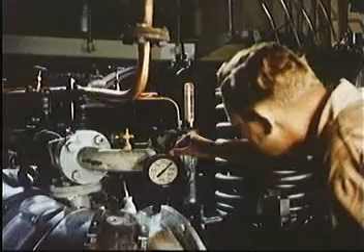His routine inspection takes him further down to the second platform with the intercoolers for charging air.

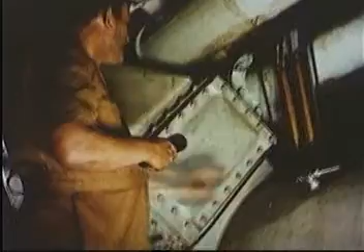Now he reaches the bottom, where his flashlight reveals the return piston cooling oil behind the sight glasses.

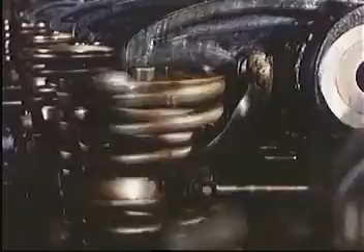To make a further study of the diesel engine, we leave the engineer and his instruments and put sight glasses on the engine from top to bottom. This reveals the movable parts: pistons, piston rods, crossheads, and connecting rod and crankshaft.

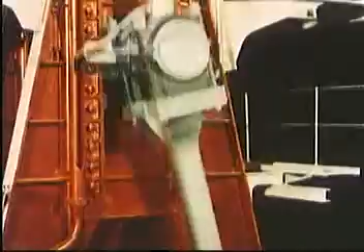This sectional view shows the function which the most important parts of the engine have to perform. In the upper part of the cylinder, an amount of fuel oil is burnt, which causes the temperature, and thereby the pressure, to rise in the combustion space.

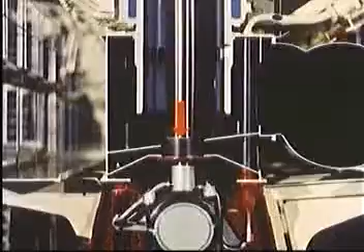The gas pressure acts on the piston, from which the force is transmitted through piston rod and crosshead to the connecting rod, and results in a torque. The thermal energy has been converted into mechanical energy.

In an arbitrary piston position during the working stroke, the crosshead is exposed to a vertical force from the piston rod and a force in the direction of the connecting rod, which together result in a horizontal force.

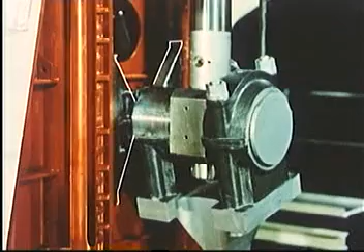This horizontal force must be transmitted to the engine frame, and for this purpose, the crosshead is provided with slide shoes supported on vertical surfaces, the guide faces on the engine frame.

Powerful forces are at work in a big marine engine, and accordingly, the engine parts are of big dimensions. In the workshop, with people providing a natural yardstick, one receives a good impression of their size.

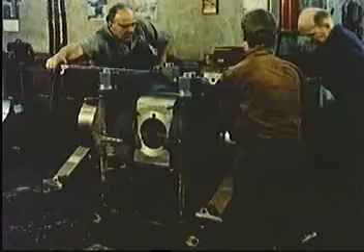So big must the crosshead slide shoes be in order to transmit the horizontal forces. The high points in the connecting rod bearing, which have been spotted by the contact with the crosshead pin, are scraped off in thin chips.

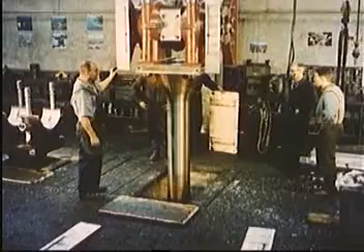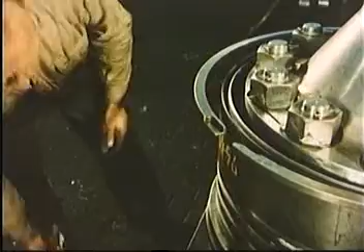To provide tightness against the high pressures, the piston is fitted with piston rings. The ring is fitted by a special tool which imparts an evenly distributed bending moment to it, thus preventing the danger of a permanent deformation.

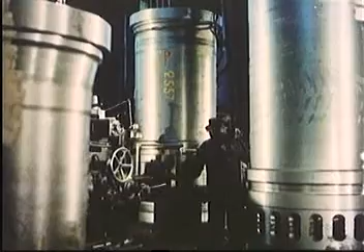The cylinders are not easily overlooked either. The scavenge air ports are bored oblique to a diametral plane to set the scavenge air in rotation.

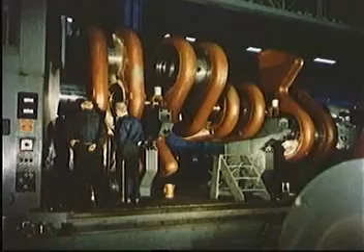The crankshaft is so big that to facilitate manufacture and installation, it's made in two halves, which are bolted together later. Each half is built up from a number of individual parts.

Main bearing journals, crank webs, and crank pins. The crank webs are provided with counterweights.

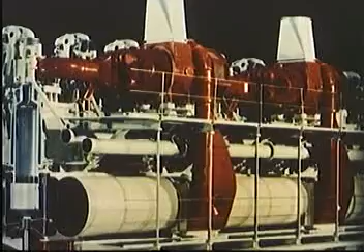Let's look a little closer at the principle on which a two-stroke engine works. Fresh air is supplied by a blower. From the blower, it's conducted in a pipe along the engine to the scavenge air space around the cylinder.

When the piston approaches the end of the downstroke, the exhaust valve opens, the scavenge air ports are uncovered, and fresh air flows up through the cylinder. Exhaust valve and scavenge air ports are then closed, and during compression, the air is heated for ignition of the injected fuel.

The combustion increases the temperature and thereby the pressure which drives the piston. The exhaust valve opens, the pressure falls, and the combustion products are expelled. The air is again compressed.

Fuel is injected, ignited. The gases expand. The exhaust valve opens, then the scavenge air ports. The cylinder is scavenged, and the cycle is repeated.

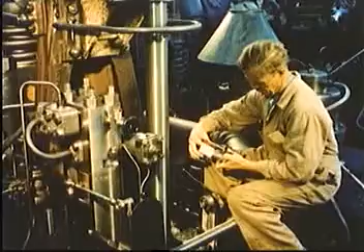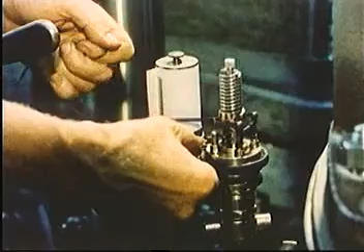The pencil is now moving in time with the pressure variations inside the cylinder. The drum carrying the paper is connected to the drive from the engine piston, its motion proportionate to the piston motion. The pencil records the pressure events during an engine cycle.

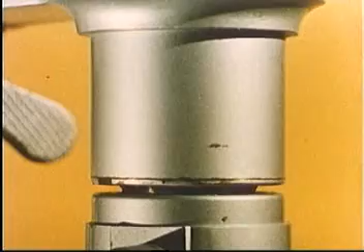The construction of the indicator is simple. Through a duct, the gas pressure is transmitted from the combustion space and acts on the indicator piston moving inside a small cylinder.

The motion is resisted by a spring. This spring is exchangeable so that it may be adjusted to different pressure ranges.

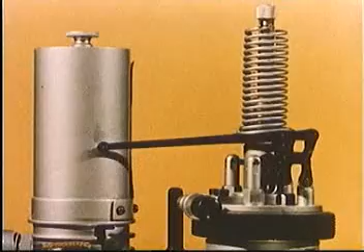The motion is communicated to a lever at the point of which a pencil is fastened. The pencil is pressed against a drum moving back and forth with the up and down motion of the engine piston. Thus, a curve is traced which shows the relation between the gas pressure in the engine cylinder and the position of the piston.

The output of an engine is dependent upon the relation between pressure and volume in the cylinders during compression, combustion, and expansion.

For each separate cylinder, the indicator traces a curve, the so-called PV diagram. The diagram shows that the pressure is almost equal to the scavenge air pressure when the scavenge ports are uncovered. The exhaust valve and scavenge ports are then closed.

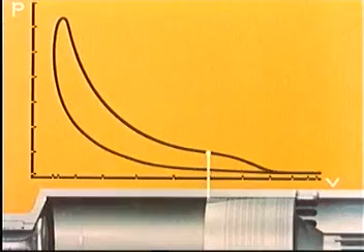The air is compressed, and when the fuel is injected and ignited, the pressure will rise rapidly and remain at maximum during continued injection. After injection, the pressure in the cylinder falls to exhaust pressure, and during the exhaust period to scavenge air pressure.

Scavenging, compression, combustion, expansion, exhaust, and back to scavenging.

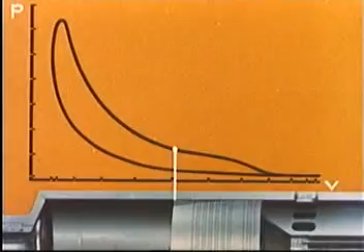The characteristic pressures are approximately a compression pressure of 54 kilograms per square centimeter, maximum pressure 66, exhaust pressure 8, and scavenge air pressure 1.75 kilograms per square centimeter.

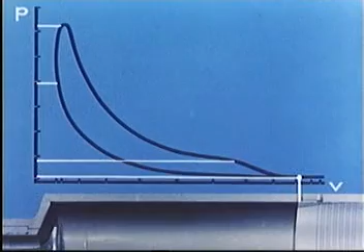From the indicator diagram, the indicated output may now be computed. At an arbitrary position of the piston during the compression stroke, there is a certain pressure, P, acting on the piston top. If the piston travels a short distance further, corresponding to delta V, and if we ignore the minimal change in pressure, the amount of work done, delta A, will be given by the pressure multiplied by the change in volume, or P times delta V.

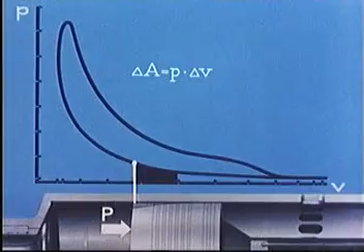This work is represented by the area below the part of the compression line corresponding to delta V. And the same applies to every single part of the compression curve. That is to say that the whole area below the compression line represents all the work that the piston must perform to compress the air in the cylinder.

During the expansion, the piston pressure acts in the same direction as the piston is moving. So therefore the piston receives an amount of work, and it will be seen in the same manner as before that the amount of work received is represented by the area below the expansion curve.

The amount of work transmitted to the piston during a full engine revolution must therefore be the difference between that delivered during the compression and that received during the expansion. In other words, it is given by the area between the curves. Thus, A equals sigma P multiplied by delta V.

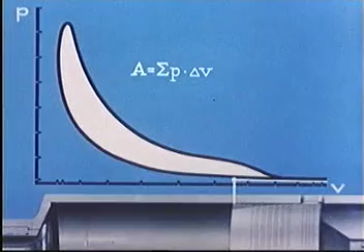One could imagine the same area being produced by a compression stroke under atmospheric pressure and an expansion stroke with a constant pressure on the piston.

This constant pressure, Pi, the mean indicated pressure, can be determined so that it gives the same area as in the actual diagram.

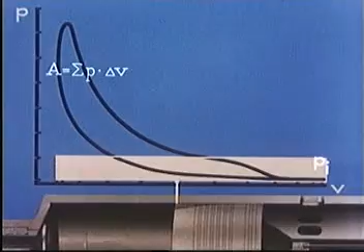In calculating the power, it is a great advantage to have to reckon only with a constant Pi during the expansion stroke, instead of the actual varying pressures in both the compression and the expansion strokes.

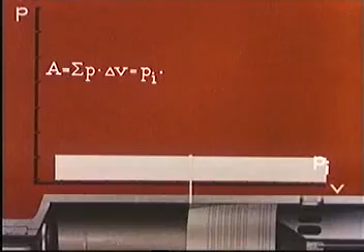The work in kilogram centimeters for one revolution will thus be A equals Pi multiplied by Vs, where Vs is the full stroke volume in cubic centimeters, and Pi the mean indicated pressure in kilograms per square centimeter.

There is one working stroke in each revolution, so if we multiply by the revolutions per second, n over 60, we get the work in kilogram centimeters per second, that is to say the power.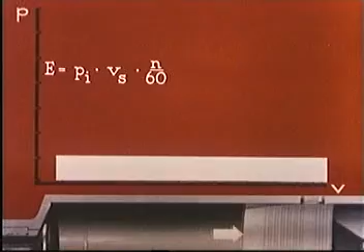Instead of Vs, we substitute the piston area multiplied by the stroke length, that is pi over 4 multiplied by d squared multiplied by s cubic centimeters.

To arrive at the output in horsepower, 75 kilogram meters per second, we have to divide by 7,500, and we thus have the equation for computing the horsepower developed in each cylinder of the engine.

To take an example, an engine with a Pi of 9.5 kilograms per square centimeter, a piston diameter of 84 centimeters, a piston stroke of 180 centimeters, running at 110 revolutions per minute, will have an indicated output of 2,300 horsepower per cylinder.

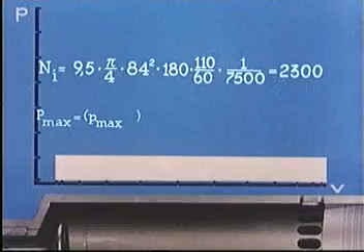The largest force acting on the piston is the highest combustion pressure less the atmospheric pressure on the underside of the piston multiplied by the piston area, or 65 multiplied by pi over 4 multiplied by 84 squared. That is 360,000 kilograms.

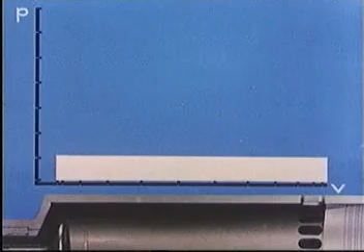The indicator diagram may also form the basis for computing the temperatures in the cylinder.

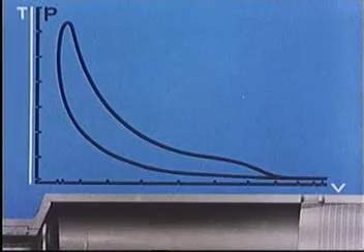Just after the scavenging, at the beginning of compression, the temperature is TO, the volume VO, and the pressure PO. From thermodynamics, we know that the pressure multiplied by the volume divided by the temperature is constant for an isolated amount of air, which is the case here in the cylinder, independent of the position of the piston, so long as the valve and the scavenge ports are closed.

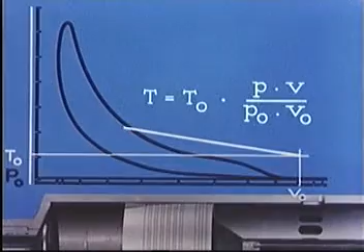The equation can be rearranged to express the temperature T direct for an arbitrary position of the piston. The indicator diagram gives us the values that are to be substituted in the equation when computing the temperature for the top position of the piston.

Substituting the initial temperature, 350 degrees Kelvin, the initial pressure, 1.75 kilograms per square centimeter, the initial volume, 950 liters, the pressure in top position, 54 kilograms per square centimeter, and the compression volume, 78 liters, we find the temperature to be 890 degrees Kelvin.

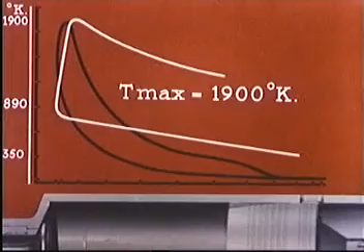The highest temperature occurs at the cessation of combustion. It is here found to be 1900 degrees Kelvin. In this way, the whole of the temperature curve may be calculated, right up to the moment when the exhaust valve opens. To get a better idea of what is happening, we will measure in degrees centigrade instead of degrees Kelvin.

Already during compression, the temperature reaches the melting point of lead. During the first part of the combustion, the temperature reaches the melting point of aluminium. Shortly after that, the temperature reaches the melting point of cast iron. The high temperatures in the cylinders even exceed the melting point of steel.

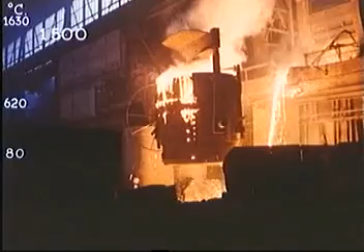Combustion takes place so quickly, however, that there is not time for the high temperatures to be transferred to the cylinder wall. The temperature of the metal surfaces will not exceed the mean temperature of the process, about 620 degrees centigrade. Then again, the cylinder is made of cast iron, which begins to lose its strength already at around 300 degrees centigrade, besides which the lubricating oil will lose its lubricating ability if it becomes too hot.

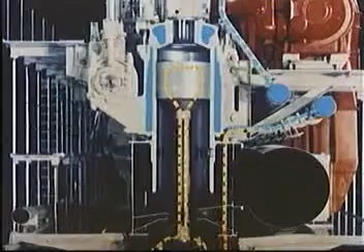It is therefore necessary to provide efficient cooling, partly with oil or water led through the piston rod up into the piston itself, and partly with water circulating through the cooling jacket around cylinder and cylinder head. If a cooling water temperature of about 70 degrees centigrade is maintained, we can prevent the temperature on the inside of the cylinder wall from exceeding 300 degrees centigrade.

This is possible because there is a drop in temperature as the heat passes from air to metal. The gas molecules are in violent motion inside the cylinder, but out near the wall they are slowed down and form an insulating layer. This causes a rapid fall in temperature at the boundary between gas and metal.

Through the wall itself the temperature falls evenly, but as the heat flows into the cooling water, there is again a sudden drop in temperature owing to the retarded motion of the water molecules in contact with the wall.

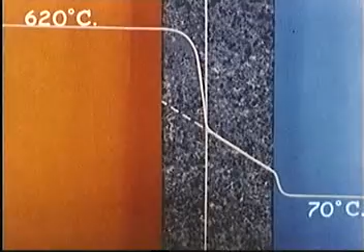The mean temperature of the gas is 620 degrees centigrade, and the cooling water is kept at 70 degrees centigrade. It is possible to calculate a thickness of iron that offers the same resistance to heat flow as the boundary resistance between air and cylinder wall, and similarly a thickness of iron that corresponds to the boundary resistance between cylinder wall and water.

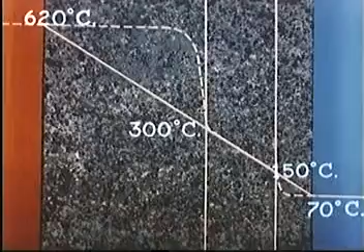As the drop in temperature through the entire homogeneous iron wall will occur evenly, the temperature of the original cylinder wall can be determined. These temperatures, which are calculated for the hottest point in the cylinders, explain why the materials are able to withstand the high combustion temperatures.

The indicator diagram shows that the combustion in the cylinders occurs within a fraction of the time of a revolution. Within this fraction of a second, defined by the flashes, 50 grams of oil must be burned.

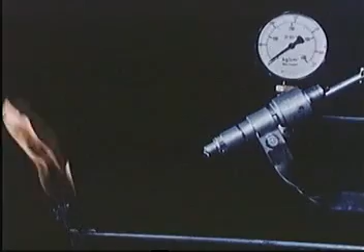A strong atomization of the oil is a condition for the short time of combustion. Without atomization, the oil will not ignite at all, even though the stream passes right through a flame.

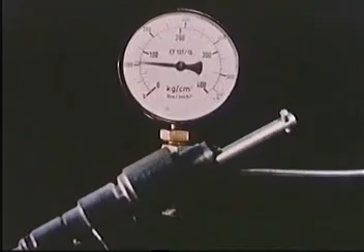If the pump pressure is raised to 80 atmospheres, the oil is more finely atomized, but not enough to ensure reliable ignition. At a pump pressure of about 200 atmospheres, the atomization is so good that all injections are ignited.

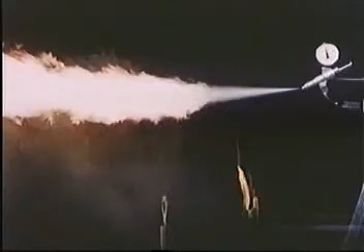At the same pressure and continued injection, a flame is formed. But the flame soon dies out owing to lack of oxygen. Not until air is admitted through the pipe in the lower part of the picture can the flame be kept burning. The flame is formed some distance from the nozzle.

The distance between nozzle and flame is about 4 decimeters. This corresponds to an interval of 1/400th of a second from the start of injection to the start of ignition, the delay period. In the hot engine, the ignition delay is approximately half.

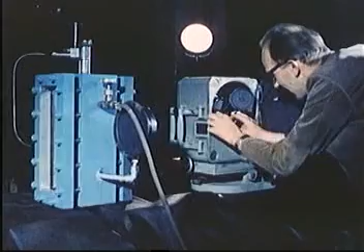An experimental setup with a pressure chamber and a high-speed film camera taking 3,000 pictures per second will show the dependence of atomization upon the friction between oil droplets and air molecules. First, a vacuum is created in the pressure chamber, and the high-speed camera shows the appearance of the stream before it hits the bottom of the chamber.

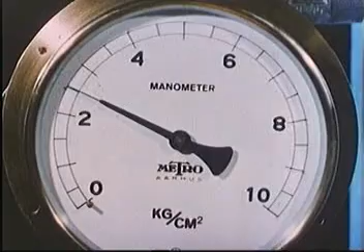Then the vacuum is succeeded by a pressure of 2 atmospheres, and the high-speed camera registers the stream, which now has smaller droplets and a wider spray angle. The friction with the air molecules will be greater and atomization better when the oil is injected under high pressure.

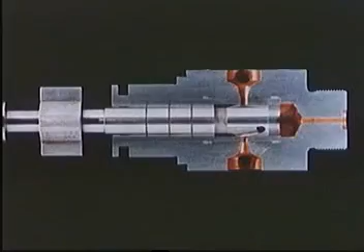In the diesel engine, the pressure is produced by a fuel pump. The oil is taken in through a ring chamber, from where it is drawn out into the pump barrel, connected by a hole in the front of the plunger to a milled out recess in the plunger.

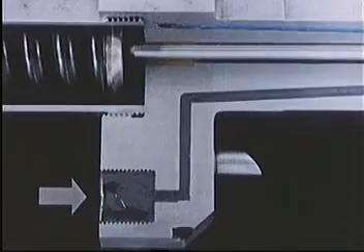The oil flows from the pump through a filter to a closed duct in the fuel valve. A heavy spring presses on the needle valve, which bars further access to the nozzle.

The rise in pressure begins when the plunger has closed the inlet port. The oil presses on the conical end of the needle valve, lifts it a trifle, whereby the pressure area is increased and the needle snaps up. The oil now streams out through the nozzle holes at a very high velocity, resulting in a fine atomization.

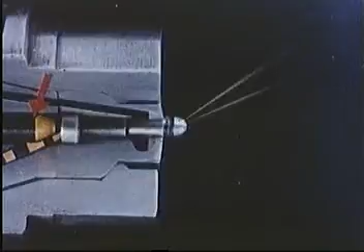When the helical groove of the plunger passes the inlet port, the oil may flow freely back into the ring chamber during the continued movement of the plunger. The moment the plunger uncovers the inlet port, the oil pressure falls and the valve spring snaps back, pressing the needle into its seat so that it shuts off access to the nozzle.

The helical groove on the plunger makes it possible to regulate the amount of fuel. If the plunger is turned in one direction, the useful stroke of the pump will be increased. If turned in the opposite direction, it will be reduced.

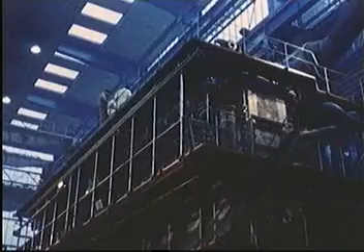Not all the energy contained in the oil results in mechanical work. The process incurs losses. The losses may be localized by drawing up a heat account, a heat balance. For instance, for this engine, which is erected on a test bed and provided with the necessary measuring instruments. The engine is receiving a final checkup and adjustment.

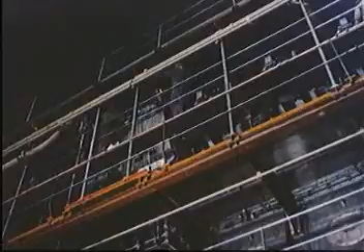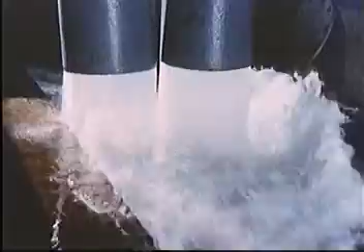Before the engine is started, cooling water and oil are turned on. Also, compressed air is needed for the starting.

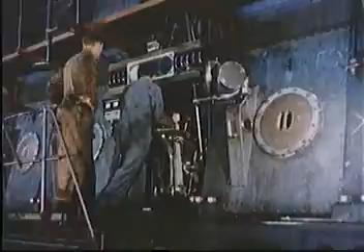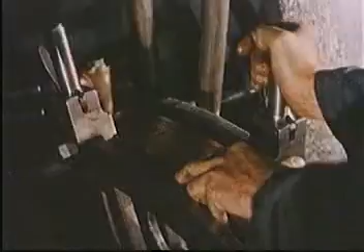The control lever is moved, regulating the fuel pumps for increased injection. The speed of revolution is rising.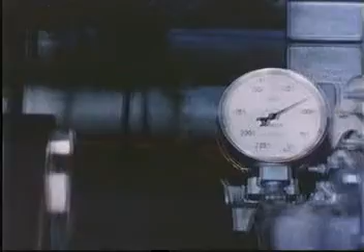The engine has now reached its full RPM, and we are able to find the power by means of the torque registered here on the dynamometer. If at the same time we measure the consumption, the air and cooling water quantities, and the temperatures, a heat balance can be drawn up.

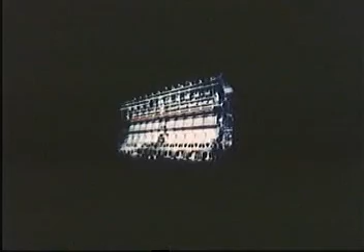Let us imagine the engine as being isolated in a box. The energy admitted to and rejected from the box is ascertained for use in the heat balance. Whatever else happens inside the box is irrelevant to the heat balance.

Energy is admitted from the fuel tank in the form of fuel oil. Thermal energy is carried away by the heated cooling water. Thermal energy is also carried away in the hot exhaust gases. And mechanical energy is absorbed by the dynamometer.

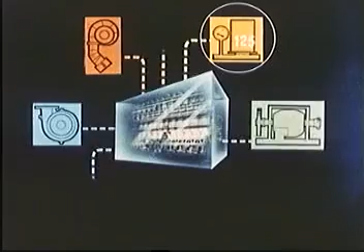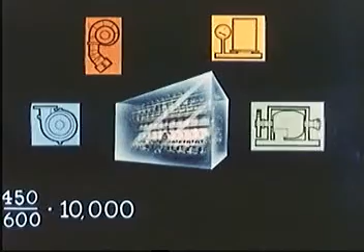If by weighing we find the amount of oil consumed in 10 minutes to be 450 kilograms, we are now able to calculate the thermal energy admitted per second. It will be 450 kilograms divided by 600 seconds multiplied by the calorific value of the oil, 10,000 kilocalories per kilogram, giving 7,500 kilocalories per second.

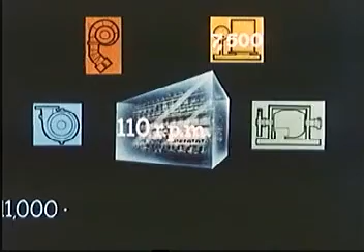The energy produced is determined by the speed of the engine, 110 RPM, and the brake torque registered on the dynamometer as 111,000 kilogram meters. The power will be the torque multiplied by the angular velocity. To obtain the result in kilocalories per second, we divide by 427. The result is 3,000 kilocalories per second.

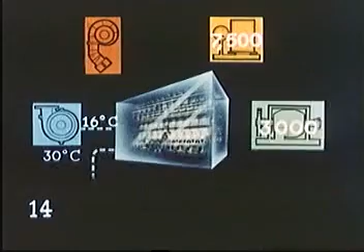The energy carried away by the cooling water is determined by the temperature rise, 14 degrees centigrade, multiplied by the quantity of cooling water, found to be 123 kilograms per second. That is 1,720 kilocalories per second.

In a similar way, the energy discharged with the exhaust gases is calculated from the rise in temperature, the amount of air, and the specific heat, and found to be 2,700 kilocalories per second. A clearer picture is obtained by converting the figures into percentages of the energy admitted.

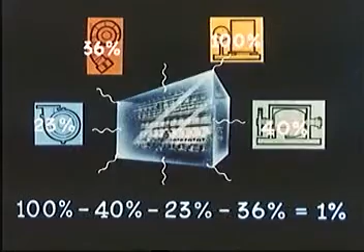Drawing up the account, we see that there is a discrepancy of 1% on the loss side. This loss of energy is ascribed to the radiation of heat from the engine, which we have not been able to measure, plus unburnt constituents in the exhaust gas.

It will be seen that the efficiency of the diesel engine is about 40%, which is more than can be attained with any other type of heat engine.

The efficiency is a deciding factor in how far a ship is able to sail on a certain quantity of fuel.

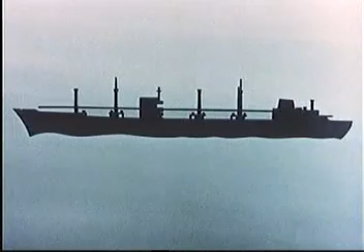If a diesel motor ship can sail 2,000 nautical miles, a steam turbine ship will sail 1,500, and a ship with gas turbine 1,000 nautical miles on a given quantity of fuel.

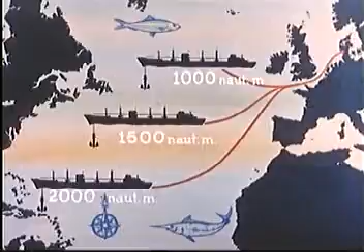The engineer is still on his job, securing a long life for his engine by checking and testing. And one thing more, by knowing the meaning and function of every little detail of his engine.